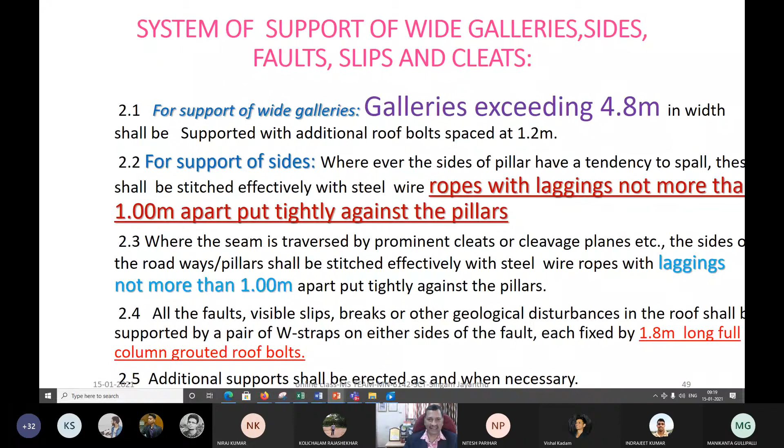If it is in wide galleries, or fault planes, slip planes, or where it is highly geologically disturbed, continuing with that, when the galleries are geologically disturbed, there are so many instances where many types of supports were tried, but we could not extract it. And ultimately, some places are supposed to be left unextracted, considering them highly geologically disturbed areas.

But sometimes we are supposed to devise or design in the interest of conservation of mineral or coal, and we may not be having that much reserve without geologically disturbed areas. As was the practice in olden days, maybe 50 or 60 years back, where some places were highly geologically disturbed, we used to leave them, and work only in places where our deposit is there with minimum or no geological disturbance.

But that choice is not there, my beloved students, for the next and next generations, because this mineral, or coal, for that matter, since we are talking about the coal reservoir and strata control related to that. That choice is not there for next generations, but we have to devise some innovative methods even in geologically disturbed places. That is the reason why we should know more and more. That's where the essence of our strata control engineering is very much required. Innovative technologies are required, and that is the reason why we are reading all this.

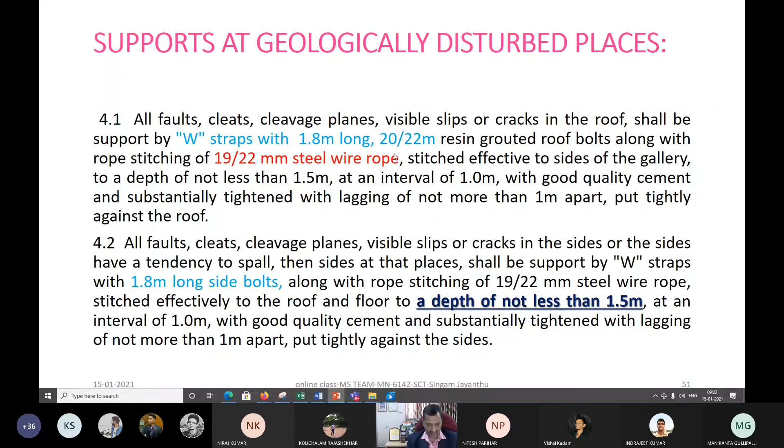So here, resin grouted roof bolts, 1.8 meters long, with a 20 or 22 millimeter diameter—it's not meter, this should be corrected to 22 millimeter diameter resin grouted roof bolts—along with even rope stitching.

Rope stitching is also very common, mainly used wherever it is highly disturbed, and we have to keep it for some time, something like a dead weight to be taken care of. In those cases only we prefer this type of rope stitching, with 19 or 22 millimeter wire ropes generally used, and even on the sides, not only the roof, in the sides of any gallery.

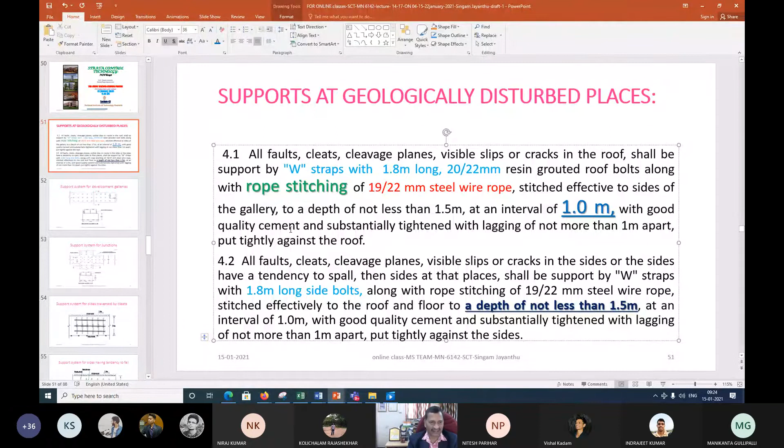As explained previously, they use something like a J bolt, which I will show again. These are installed at intervals of 1, 1.2, or 1.5 meters, depending on the support requirement as per estimation or calculations discussed in the previous class. The quality of cement used as a grouting mixture is very important, connecting to the critical embedment length we discussed earlier.

It can be cement mixed with sand, or sometimes only resin. Nowadays we prefer resin. The distance between the rope and the roof level is tightened with laggings, and this distance should not be more than 1 meter. This relates to the critical span discussed earlier, which is why closer intervals are generally preferred, to take care of any local fall.

Local fall doesn't mean the whole roof falling, but falling in patches. If this is a roof, in patches it may fall, so in-between laggings take care of this, and they are kept tightly against the roof. This is how it is done.

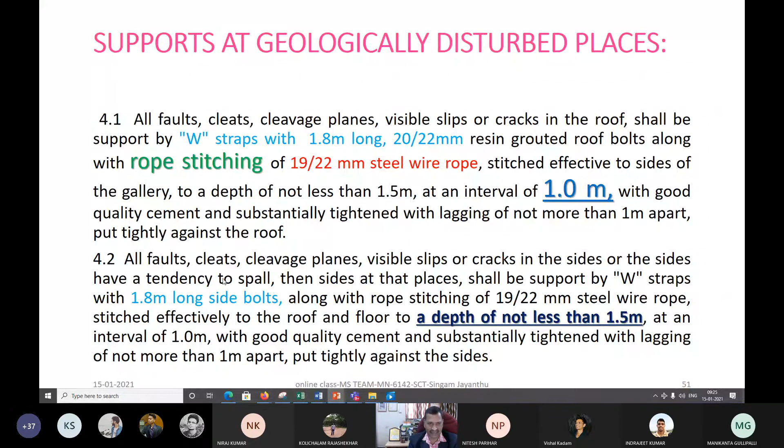All faults, cleats, visible slips have a tendency for this, and it's almost similar whether it's the side or the roof - the same approach is generally followed. This is how it appears when it's a roof bolt.

Since we are blasting at a time about 1.8 meters, after blasting you get a pull of about 1.5 meters or so, and 1.5 plus 0.3 becomes 1.8 meters again. When you install another bolt at a distance of about 1.5 meters, 0.3 meters from the face is left. This is how the support system continues along with development.

In a 4.2 meter setup, you can see 1.8 meter long bolts. This is generally followed especially in GDK 11 and other places, and we prefer it even in conditions at our Orient mine, like Mahanadi Coalfields Limited, as I told you.

But there may be other alternatives to consider, because while designing supports we have to consider many other issues. This can alternatively be cement grouted, or with quick setting rapid set hardcrete mixed, so cost is reduced compared to resin bolts, with satisfactory performance.

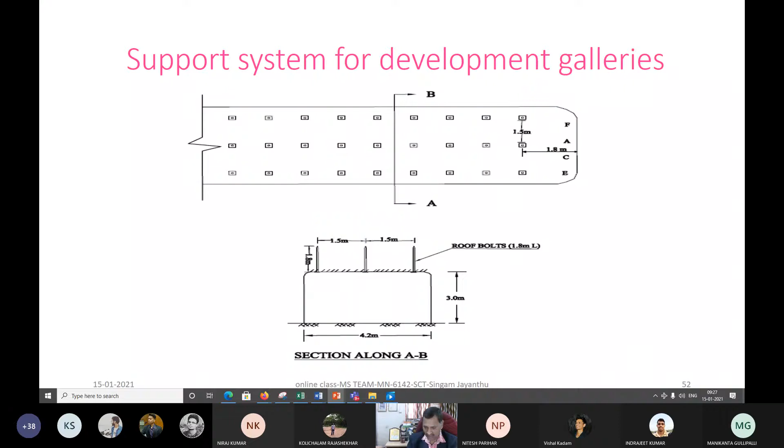How to ensure this performance, I will explain, along with the responsibilities you'll be given as a strata control engineer or assistant manager taking up the role to take care of the strata.

Last time I showed additional supports required at junctions - that's 25% extra, estimated based on empirical formulations. Why it should be only 25, not 28 or 27 or 23 - these are some type of empirical models.

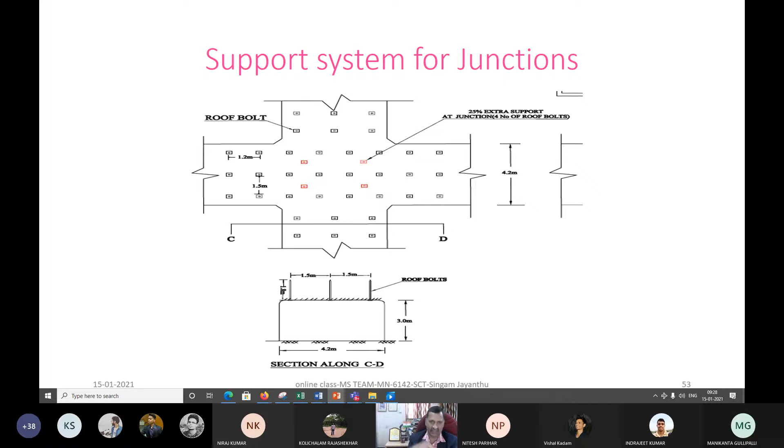These are relationships developed based on observations, which is why observational approaches are highly preferred in rock mechanics or geomechanics designs compared to analytical or numerical models. Those analytical or numerical models give insight into the science, or serve approximation purposes only. Otherwise you have to observe and then design - this is what is supposed to be done.

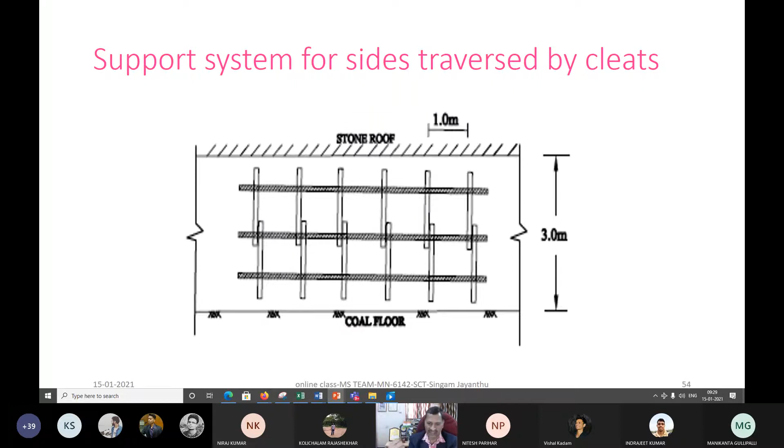For sides where cleats and other features are traversed, we use stitching, or instead a W strap can be used to connect between the bolts. Otherwise, side stitching and laggings - this is how it appears. On the sides at 1 meter intervals, not more than that, so the chance of dislodging along cleavage planes in patches is minimized.

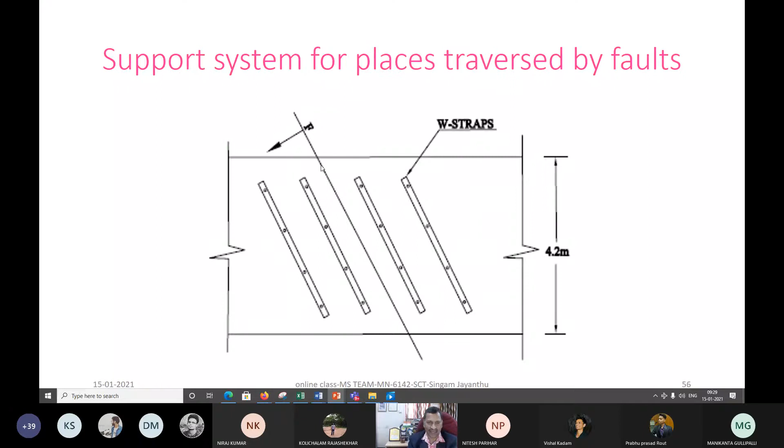That is the case for sides having a tendency to fall, and steel wire ropes. This is the way you can see it, and if there are some types of fault planes, as we have seen already in the last time.

Now coming to some more issues of these support systems: setting and quality of support is very important. The setting should be ensured for proper working of these installed supports, and we have already seen in so many mines if it is not proper, starting from the skill of the persons who are installing the supports.

In general in the mines we call them timbering mazdoors or coal cutters, right? And this is a roof bolting mazdoor, or gang, whatever name they give, and they are responsible, right? Of course, under the supervision of the next line of supervision, like mining sardar and overman, and you people will come in the initial stage as assistant manager, or shift in charge, or panel in charge.

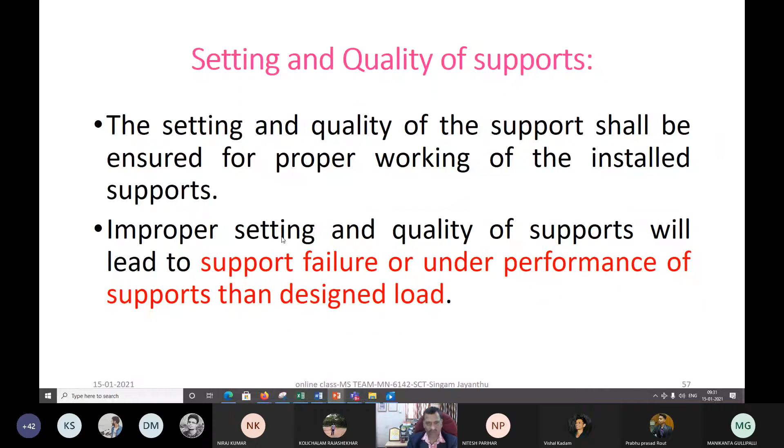Then improper setting, or the quality of support: if even the cement quality or the resin quality you select is not proper, its performance will be poor, and that will lead to failure, whether a support failure or sometimes a total roof failure. So those things should be taken care of, proper quality ensured, and there are ways to do that.

So many details are already provided in the regulations for coal mines, in SCAMP and the associated circulars. But in a gist we should understand, in these related mines A, B, C, without taking names, that roof bolting shall be done with pneumatic roof bolters.

There are some reasons why we suggest this if you are going with mechanized mining, especially when we need more and more bolts, because when there is more face advance per day or per shift, it requires more bolts. That is very simple to understand, for better performance. That is possible by reducing manual labor or physical work and utilizing machines. Some of those machines are our pneumatic bolters.

Long back, 20 years back, we even imported them from Australia, and later our people started manufacturing them. Then there is the physical labor when you are using a manual bolting machine or coal cutting machine, whatever you have seen in your laboratory, sometimes the 1.25 HP coal cutting or drill machine. That is generally used when making manual holes for the installation of supports, right?

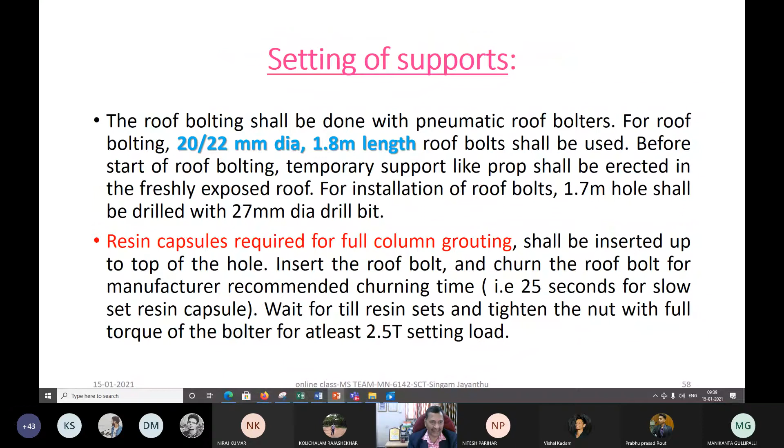And then you are tightening with your bearing plate and then nut. This is the way we have to ensure proper setting. Otherwise, if torque is not developed, right? That means your resin itself is not working. So that will be loose and it will be rotating like that, like with ordinary cement. So this is the way to ensure that quality, the quality of the supports. Now here I am not going to give you all the details. I mean, there are so many circulars, right?

And they have given even for the manufacturers, as far as our mining engineering or Indian mining statute is concerned, any manufacturer, their designs or whatever is their product, is supposed to be approved by the DGMS and tested, and all those things are done as certification by research institutions. That includes even our NIT Rourkela, which is considered a research institute in that way. Academic and research institutes are the same. Similar jobs are being done by us.

Then roof bolts, what should be the quality? Everything is written. So they are FE 500 grade and then TMT ribbed bar, and these are all terminology which mechanical engineers can also easily understand, right. Then resin capsules, they have some characteristics, right? So they have the shelf life and are stored at 25 degree centigrade, right?

And the shelf life and other things are required very much, because suppose I purchase a resin capsule 1 month back, 2 months back, and it is not having something like an expiry date, like for a medicine, right? Now we are going to get our COVID-19 vaccine. It is to be stored at a particular temperature, and when you open that one vial of 5 ml, it should be given to 5 persons, right? At that temperature it has a shelf life; within this much time it should be used, otherwise it should be thrown out.

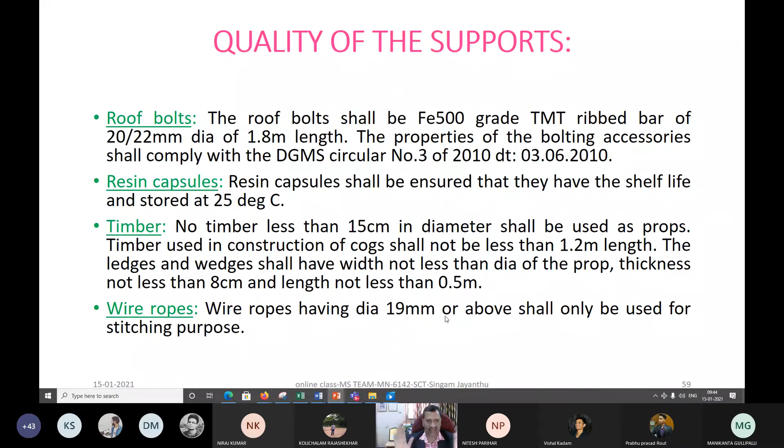So this width should not be less than the diameter, and the length should not be less than 0.5 meter, thickness should not be less than 8 centimeters. Even the plate kept on the top or the bottom, everything is given here, whether it is timber or wire ropes having a diameter of 19 mm. All these are supposed to be ensured. And this is also very important: when you have given some guidelines for the support, there should be some monitoring also, right?

So that monitoring, as I told you, I gave some hint at that time: the short encapsulation pull test, SEPT. This is not September, right? We are in January. Don't worry, this SEPT is short encapsulation pull test. And they have given all the details in DGMS circular number 4 of 2013, how it should be done and how to ensure it.

So this is ultimately to understand the efficiency of your grout or your rods, whatever you are using, in that particular type of rock mass, whether it is suitable or not. So all those things we are supposed to test. Then already you understood the difference at that time.

I explained in detail where if it is a total 1.8 meter long bolt, and then when I am applying the load, this load will not be distributed beyond that critical embedment length. That means 0.8 meter or 0.7 meter. So this load, whatever you are applying, 10 tons, 15 tons, 20 tons, before the yielding or any damage takes place in the rod itself or in the rope itself, that much of load, it is sufficient.

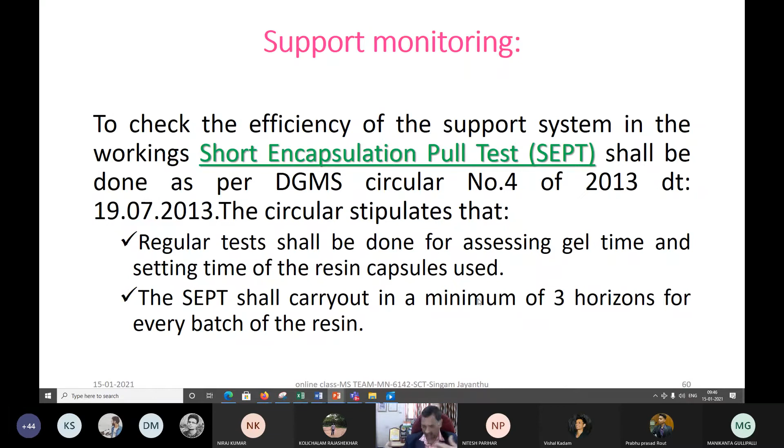Okay, so regular tests shall be done for assessing gel time and setting time of these capsules, and this shall be carried out in a minimum of 3 horizons for every batch of the resin. So they will be giving different batches, right? Batches means, on the manufacturer side, when they mix some 10 tons, 5 tons, 4 tons of material at once and then prepare, that is given a batch.

From that it is done, and it is assumed that in that batch all the mixture for that total 500 capsules or 1000 capsules or 200 capsules is one composition, according to the capacity of their mixing chamber. And another batch means another material composition is done, and that is called another batch. So each batch should be tested, and these things should be nicely recorded by you people, my beloved students.

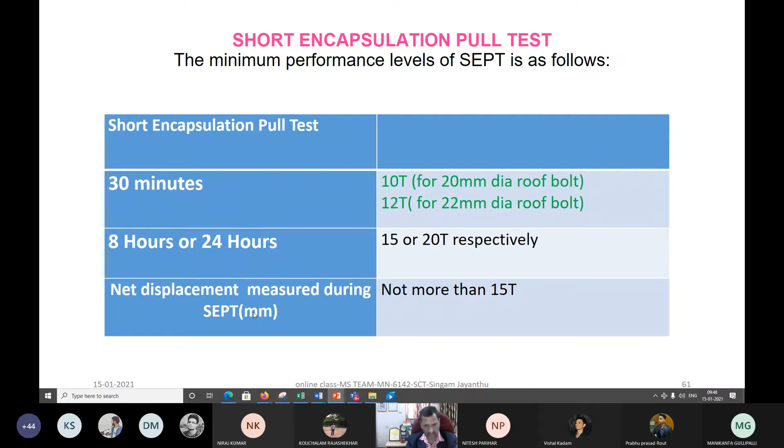Okay, then short encapsulation pull test: ensure up to 10 tons in 30 minutes, then 15 tons in 8 hours or 24 hours, and then net displacement measured, and all those things we have to record. This net displacement should not be more than 15 millimeters when you are pulling it.

Now here we are also supposed to monitor the supports. When you are providing the support, you are also supposed to monitor, but here I would like to have a small break, my beloved students, for taking up any of your queries, and then let us also take our attendance. I am downloading the attendance. Meanwhile, let us utilize this time for any of your doubts.

If you are not having any doubt, we will continue. Anybody can unmute and ask me. It can be related to your assignment topics already selected, and you are preparing, collecting all that as a good journalist, at least 10 years back, 2010 to 2020, whatever work in the international and national scenario was done related to your topic, and then one case study, so that you are preparing it nicely in an international journal format, like the International Journal of Rock Mechanics and Mining Sciences, or rock engineering.

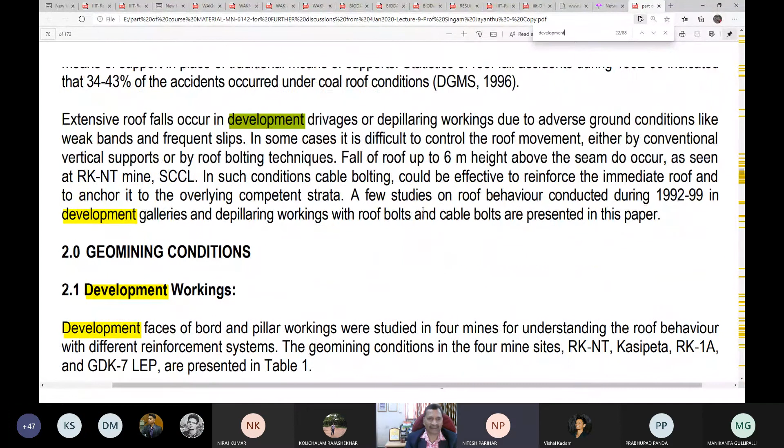Sir, screen is not visible. This screen is not? Okay. I think at that time I had taken out that screen. Okay. Now are you able to see the screen? Now it is fine. Yes, sir. Yes.

So this is a part of that. I think page number 70 of the total 172 pages of material I sent to everybody, through Nitesh and so many, right? So if anybody is not having it, you ask me. Otherwise your CR or Nitesh, so many people, will share with others.

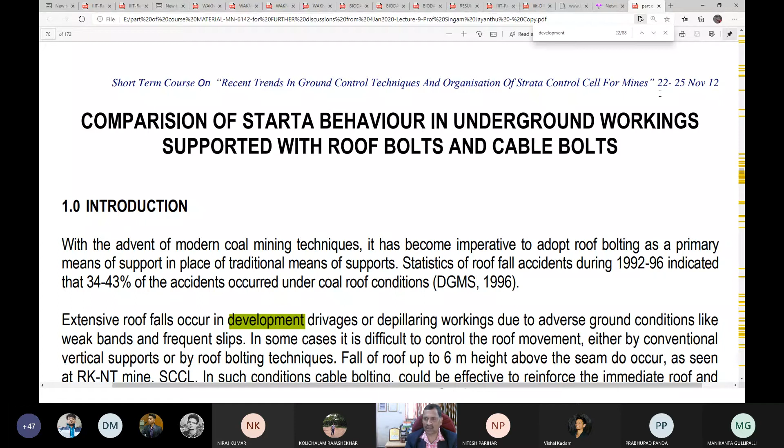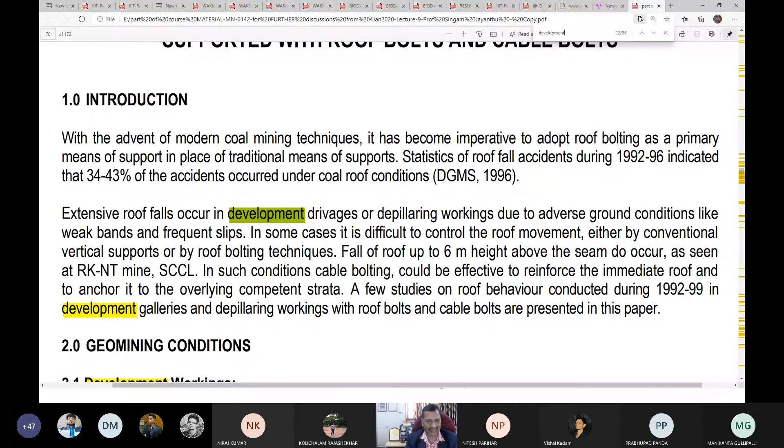There I have given, as a part of this short-term course on recent trends in ground control techniques and organization of strata control cell, which we conducted for training our strata control engineers in India through DGMS, and all of Coal India and other coal and metal mines, underground, opencast, all, 22nd to 25th November. This material is already with you. In that, the part on RMR rating, especially for development workings, I wanted to show for 5 minutes so that you go through it, and if there are any doubts, you will ask me and we will discuss and generate more knowledge for everybody in our group of strata control technology MN6142.

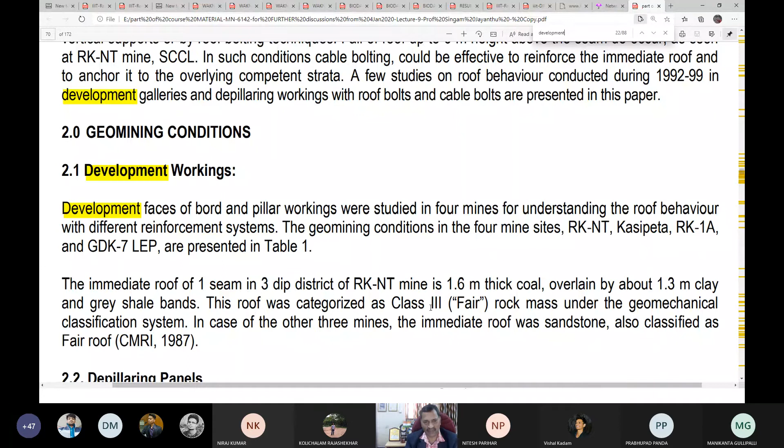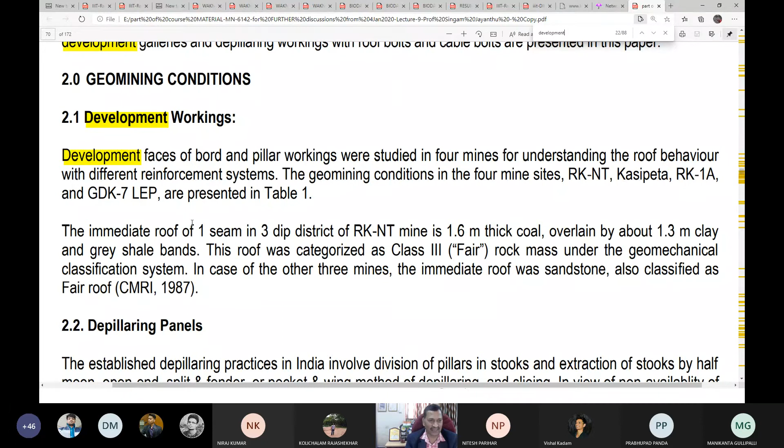Now coming to this, some panels were part of an investigation at that time in RKNT, meaning Ramakrishnapur New Technology mine, where for the first time in southern India we experimented with cable bolting in geologically disturbed places in coal mines, as part of a Ministry of Coal project. Then of course, the cable bolting method was adopted in '89 in South Eastern Coalfields NCPH 3 mine, number 3 seam. Then Kasipeta mine, RK1A, where some fatal accidents took place because of side fall, clay bands and all those things.

I am giving you different typical situations because that will help you in future; these are typical strata control problems and geomining conditions, and even the questions are generally asked like that. You are given some conditions, and how to deal with those conditions with proper strata control measures, how to design the support or how to stabilize the workings. This is the way.

That is the reason why I give more and more case studies, recent or whatever, which may not be available in the textbooks, but these are experiences. You should know about them to deal with the present problems of the industry as far as strata control technology is concerned, my beloved students. And GDK7 LEP, this is another mine you may note down, where we have seen an underground inundation problem, where water from the lower seam entered into the upper seam, and 17 persons drowned in that accident, right?

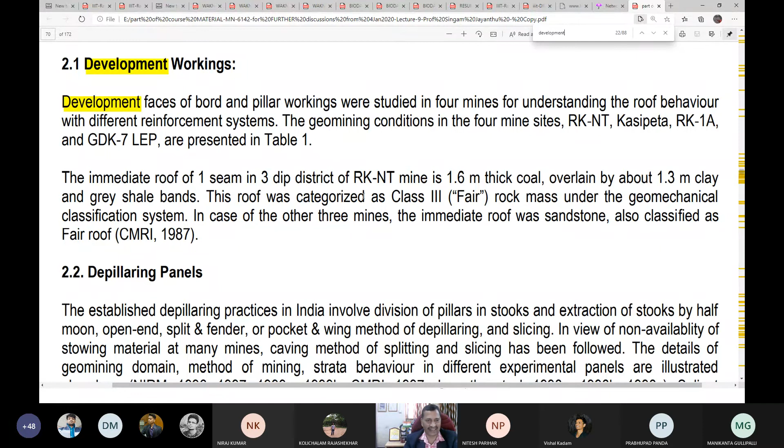So here, depillaring panels I will not discuss now, but just to show I am showing here, right? So this is the geomining conditions of development headings in the experimental section, where this parameter - some range you can note down somewhere, my beloved students - but this is the way how it happens, right? Where width of the gallery is around 3.6 meter to 4.2.

This itself you can understand - Kasipeta mine is a highly disturbed area compared to this, even RK1A which has clay and other things. But in Kasipeta there are so many cleats and highly disturbed areas, right? That's why development was also made with only 3.6.

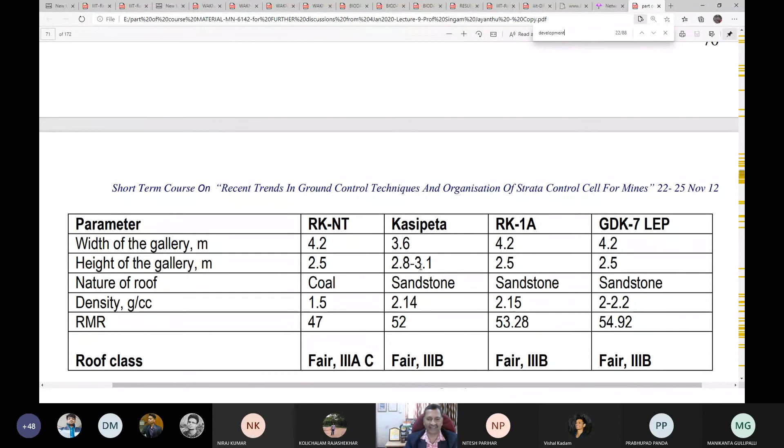That range at least you can note down, where the height of the gallery is about 2.5 up to 3 meter. This 3.1 - as per the regulation we should not have more than 3, but whatever the actual values we have, we have written here for scientific investigation purposes, right?

The nature of roof in RKNT is coal. Now you can understand, in some places the immediate roof may be coal, in some places it can be sandstone like other cases. Then density - in the coal it can be 1.5, others about 2 to 2.14 or 2.2, something like that.

And now here I just wanted you to know that rock mass rating - now you see 47, 52, 53.28, 54.92. This is what I wanted to show you, my beloved students. And based on that, in the classification, it comes out to be fair - 3, in that class A, 3B, and fair. This is the way rock mass rating is done.

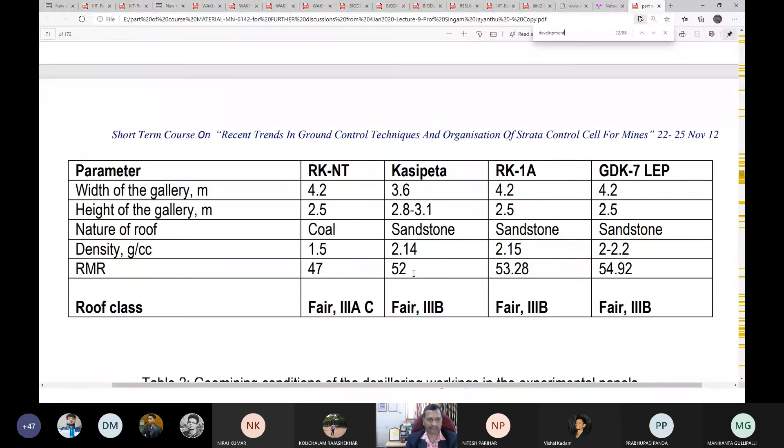And once that is done - depillaring, let us not talk about it this time - what is the support system in the development headings used in that experimental site? These things you can just note down, so that this is a way how you will be considering, right, to design the supports. I will take two, three more minutes only, so that later we will have our summary.

Before that, I can give you a simple CEP query, right? CEP question: since you have already seen the cement bolted and resin bolts, what is the basic difference in performance of these two - cement grouted bolt and resin grouted bolt? What is the basic difference, as far as its performance in offering the resistance or support is concerned, right? You are in final year and MTech masters, so you can think of it. What is the difference between cement grouted and resin grouted bolts, as far as performance is concerned? You can just give some 1 minute ideas, whoever is interested to say. That is a CEP question for you today.

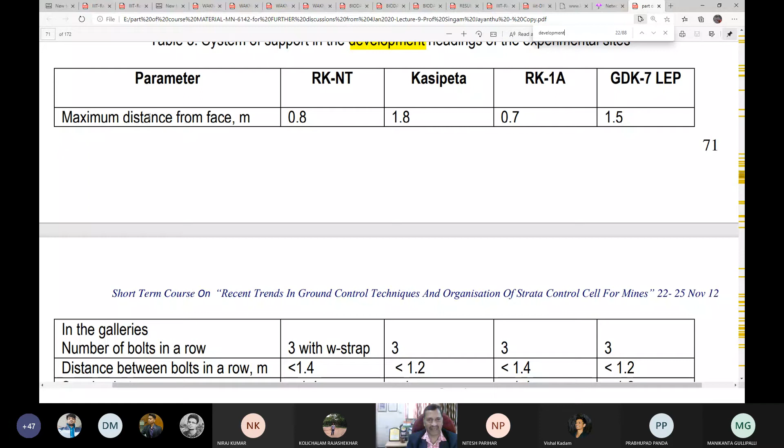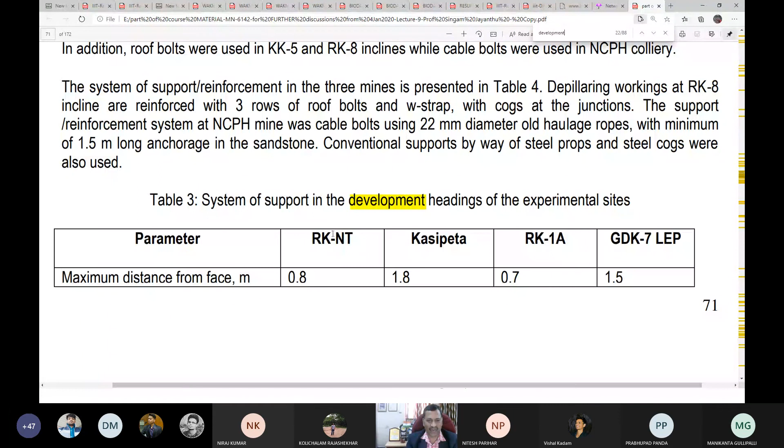Now, maximum distance from the face: 0.8 meter, 1.8 meter, 0.7 meter, 1.5 meter. Then in the gallery, number of bolts: 3 with W strap. In RKNT these W straps are used, right, and then 3 of course. Distance between the bolts is less than 1.4 meter, less than 1.2 meter - this gives you some idea, right, that in general, in practical conditions, people used even up to 1.2 meter.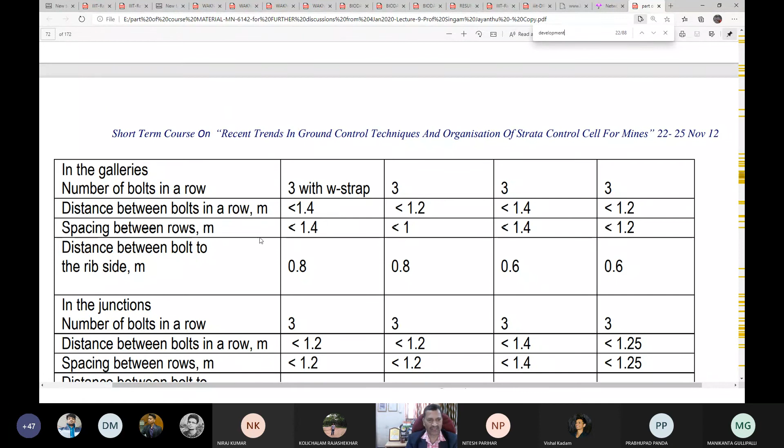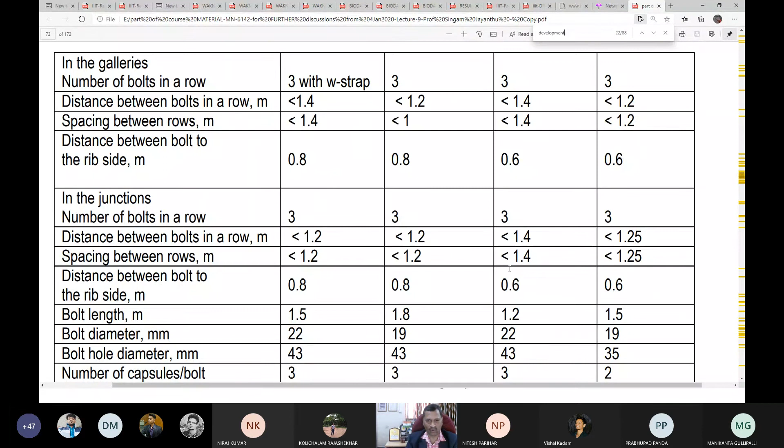Now, spacing between rows is 1.4, 1.2. Distance between bolt to the rib side is 0.8, 0.6. In the junctions, in row 3, distance between bolts is 1.25, 1.4. Spacing between the rows is around 1.2 to 1.4. Bolt to the rib, 0.8, 0.6. Bolt length here you see is 1.5 meter, 1.8 meter, 1.2 meters. Bolt diameter somewhere 22, 19, 22, 19. Then bolt hole diameter, in many cases 43, 43, 43.

That is because a coal cutting machine is used, and even for blasting purpose, the same drill machine and same drill bit is used here. That's why it's 43. Otherwise, it is not good to have that much large diameter with a 22 millimeter bolt. If it is 22, a 6 mm annulus is sufficient around, so plus 12, around plus 10. That must be sufficient. This 35 or 32 may be most ideal.

Please note that down, because these are studies done not only by USBM or NIOSH, but in so many places, especially by Scoble and others at McGill University, Canada. So many places have done it long back, and what is generally inferred is that the optimum annulus thickness is around 6 millimeter. Please note that down.

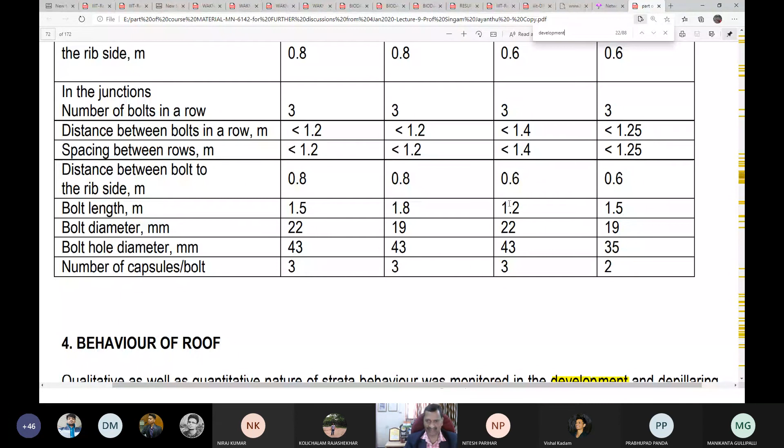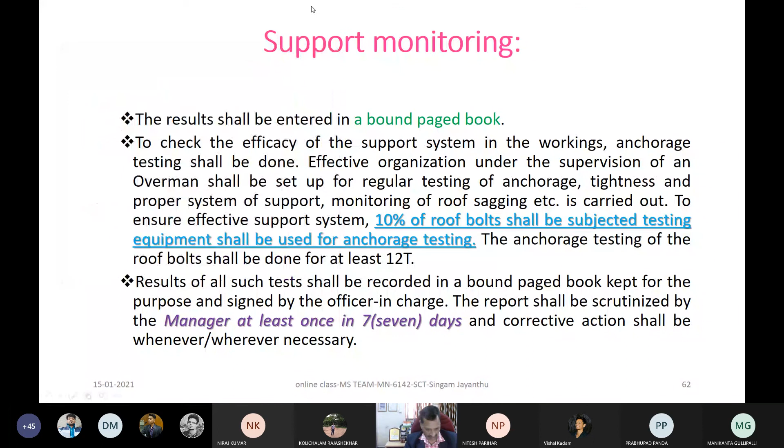Then number of capsules per bolt is 3, 3, 3, 2, depending on that. So this is what I wanted to show you, my beloved students. Let us not go into this further. For today we will stop at this stage, and then let us take up your answers, and once again I will take attendance before closing this.